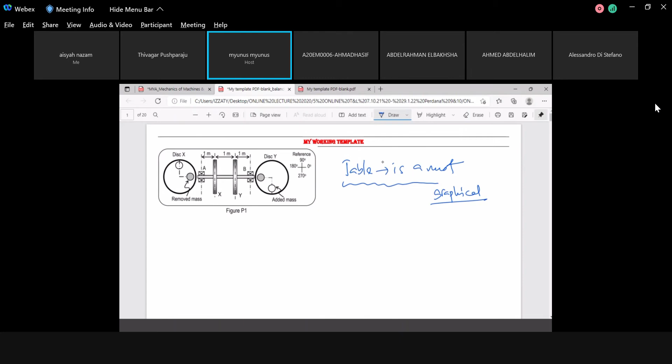So first we are going to construct the table, and the table is compulsory. It's a must. It doesn't matter which plane you start with. But the table is a must if you are solving graphically. For analytical it is an option. So now I'm going to construct it. I will start here.

Remember, start with plane, then you have mass in kg, then you have radius, which is in meter. You can also put it in centimeter, it doesn't matter. At the end of the day, you need to make the units consistent in meter. This one is the product MR, which gives you kilogram meter. The next one, put d here, in meter. d is the distance from one plane to another.

Then put MRd. This one is kilogram meter times meter, or you can put kilogram meter square. And last but not least is position, which is in degrees. So let's assume that you have plane A, then plane X, then plane Y, then plane B. You can also have plane A, plane B, X, it doesn't matter. I'm choosing this one as convenient to solve the problem. Okay.

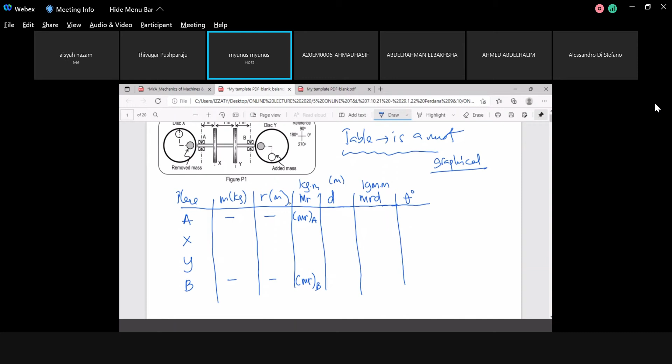Then you start selecting the reference. Yes, correct. So start selecting the reference. The reference for this one will be A and B, right? So put X. What is X? Go back to the question. They mentioned X, add 1, then remove 1. So put it here. Add 1 is plus 1. M1 is equal to plus 1. The other one is M2 is equal to minus 1.

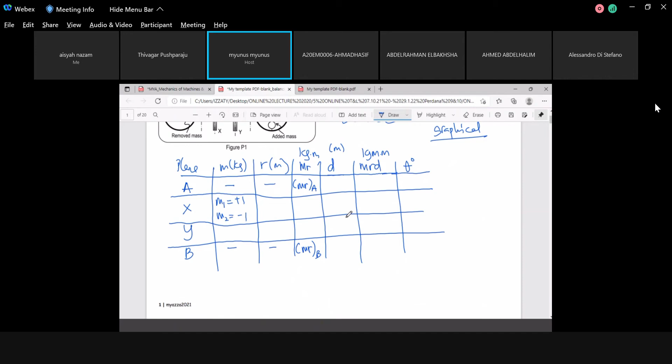Isn't it? So then you make a line here. You make a line here. You make a line here. Okay. Then the position as mentioned in the question. The radius is 3 cm and 4 cm. So put it at 3, but it is 3 cm, isn't it? Look at here, 3 cm. So you have to make the units consistent. Put it as cm. This one is 3 cm, isn't it? The other one is 4 cm. Put it at 4 cm.

And this one, what is the position? It's 90 and 0 degrees. It's 90 here and 0. And the question provides us this one. To make use of this position reference, put it there. This one, 0, 90. This one is 180. It is counterclockwise, starting horizontally, counterclockwise.

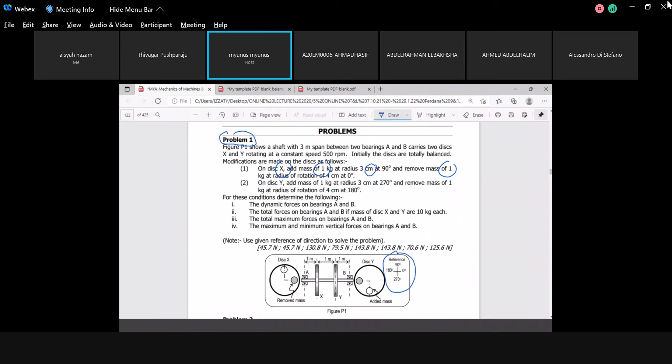Then what do you have for Y here? At Y you have 1 kg, another 1 kg, 3 and also 4. So put it here, 1 kg, M3 plus 1, and this one is minus 1, at the radius of 3 and also 4. Put it at 3, another 3 here, another 4, the radius. Okay, and the position mentioned here is 270 and 180. So put it at 270, 180. This one is 270, that one is 180. Okay, so these are the parameters that you have to fill in.

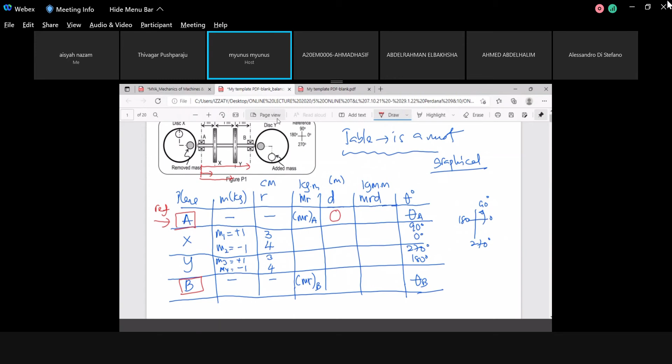So for X, for example, is 1 meter. Let me bring it a bit. For X is 1 meter. So put it there, 1 meter for X. For Y, is another meter, isn't it? It's 2 meters, right? I'm sorry, it's the wrong column. Supposed to be here, isn't it? Then 2. The next one is 3. For B, we put it at 3 meters.

Okay, now this is where you have to ensure that what you've done is correct. Why? Because one is in centimeters. This is a very typical mistake done by students. They put it in centimeters, and this one they put in meters. So you have centimeter and meter. Make sure that you use the same, consistent units.

Okay. So now, if you want to put this one in centimeters or in meters, what do you have here? You multiply by 100, isn't it? Yes or no? So now, we put this all in meters. So this one is 3 centimeters, it's 0.03, 0.04, 0.03, 0.04. So now we change it to meters.

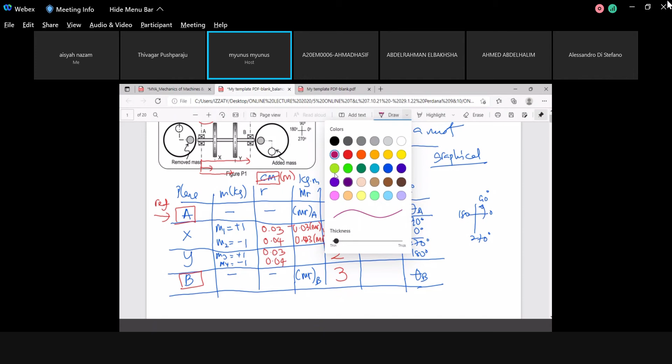And this one, MR1, MR2. But remember again, we have plus and minus, isn't it? You saw this one is plus. Let me put another color so that you can differentiate. This one is positive. This one is negative. Correct now? I purposely sometimes don't do this one in the beginning, because I want to ensure that you follow my lecture.

Okay, same thing to this one, so it becomes positive here, 0.0... Astaghfirullahaladzim, this one is correct, this one is not correct, isn't it? This one is 0.03, this one is 0.03, this one is not correct. Now this is correct. 0 point, this one what? This one is 0.04. Now it's correct? Now you have 0 here.

Okay, we have here positive 0.03, negative 0.04. This one is positive 0.06, negative 0.08. Correct? Then we have B, M, R, B. And we do not know the position, we also do not know the position. So now tell me, do you understand how I'm selecting or doing all the products of the table? Yes or no? It's not very difficult, isn't it?

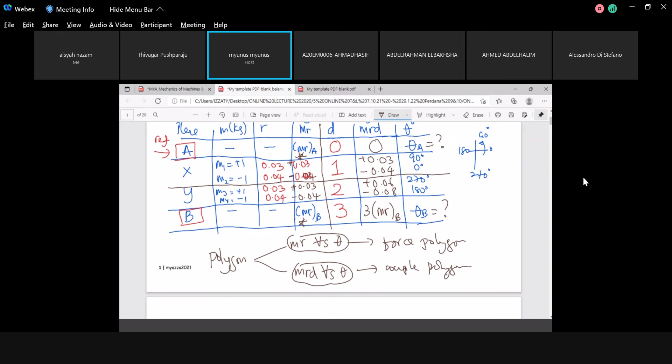Okay. So if you construct this one, you have two unknowns. This is unknown, this one also unknown, so you can't do that, isn't it? So we start with polygon number one. Start constructing polygon MRD versus theta, where the boundary condition complies, this one equal to 0, meaning that the polygon is a closed one. Okay, then start constructing.

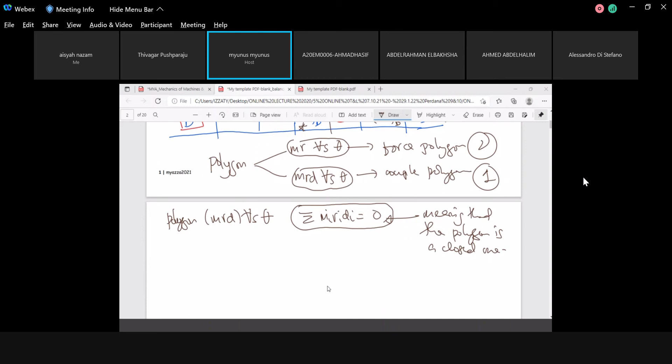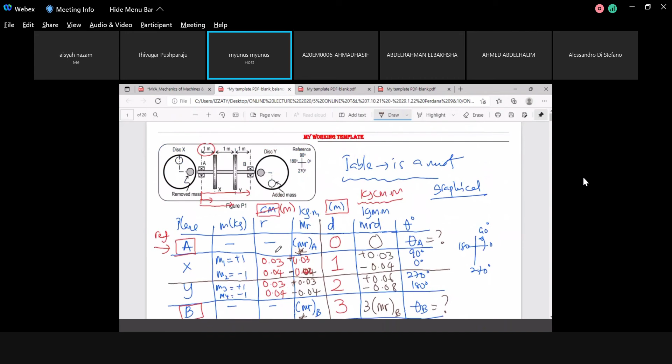Very difficult to construct because I need to make another blank page. What I have now. Again, the pull down menu is disturbing. I cannot hide the pull down menu, no idea how. Okay, never mind. I'm going to use this one as part of my polygon.

Okay. So now construct the polygon. What you have? You have 0.03, 90 degrees, so pointing upward. Pointing upward, 0.01. Sorry, it's not 0.01, it's 0.03, guys. My mind is not tuned to your class, 0.03.

The next one is 0.04, 0 degrees, so pointing toward your right. Remember this one? 0, 90, 180, 270. So toward your right. The next one, 0.06, 270, pointing downward. Then you have 0.08, 180. 180 will be pointing the other way around.

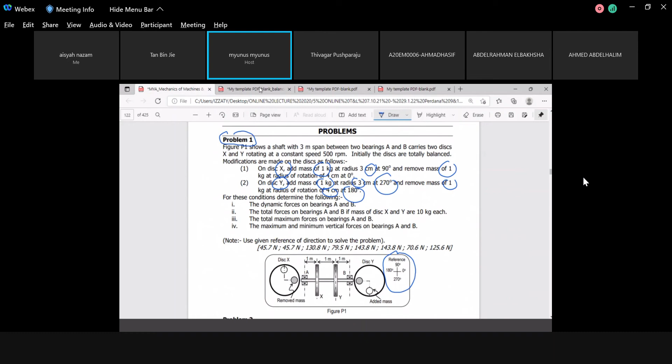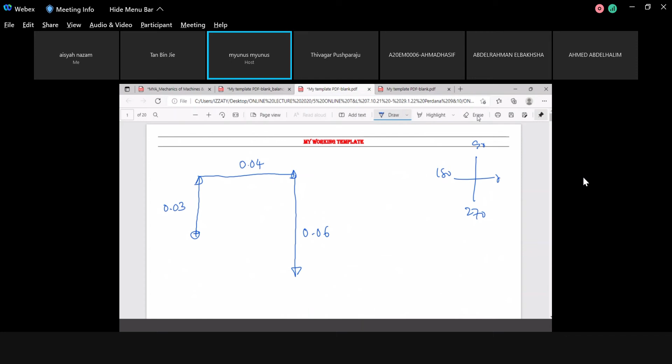Sorry, where do I get wrong? The 0 degree, the negative 0.04, right? We have 0.03, correct, 90. Oh, sorry. Thank you. This one's supposed to be 0 degrees. Let me clear the whole thing. I put the wrong direction, am I correct? This one is correct, 90 degrees. Start at the middle, it's easy for us.

90 degrees, 0.03. The next one, 0.04 is 0 degrees, isn't it? But it's negative, pointing to 180, so pointing this way. I'm going to clear this one because my polygon went out of the screen, so I need to put it in the middle.

The reason it's basically 0 degrees is correct. Pointing right, but you have negative here, so it will not point 0, but instead be pointing 180, because negative tells you the opposite direction.

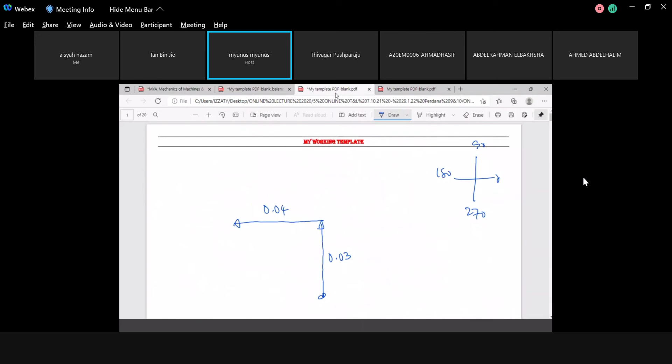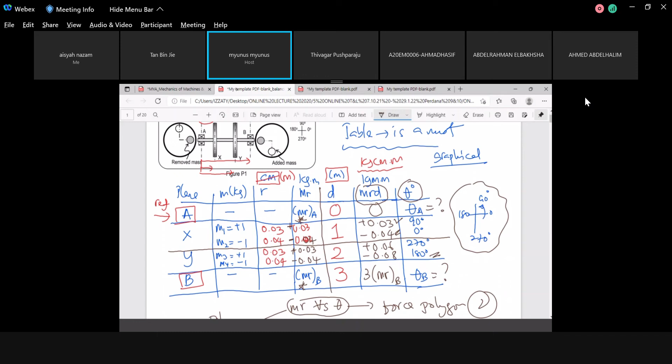So the next one is 0.06 pointing downward. Pointing downward is 0.06. The next thing you have is 0.08 negative, and it is 180. It's supposed to fall to your left, but you have negative here, so it will fall to your right at 0 degrees, so you will point that way with 0.08.

0.08, and it is not a closed polygon, but you know you have to follow this one. This is the boundary condition saying that the polygon constructed by the couple must be a closed polygon, so you force yourself to close the polygon.

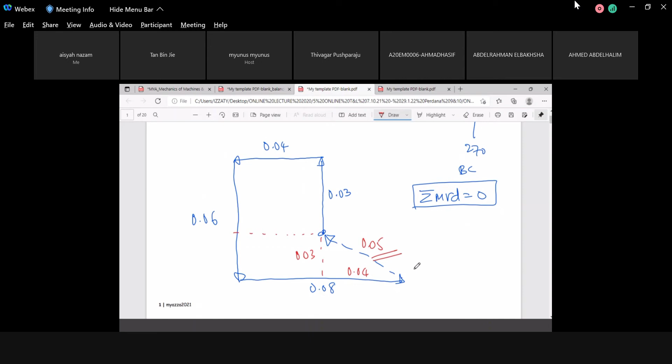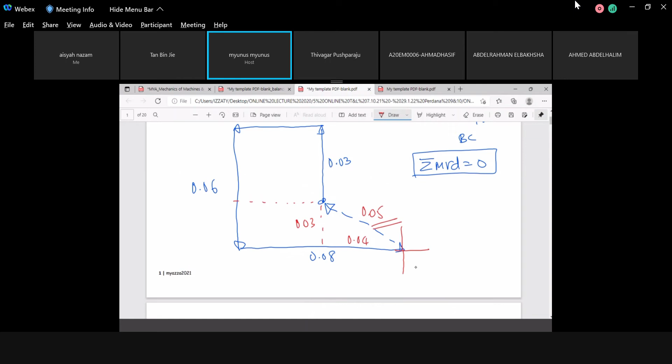Yes or no? So therefore, what we're going to look for just now is dynamic forces. So dynamic unbalance is, you will have, okay before that, class, you need to measure the angle. The measurement must be done following this counterclockwise from the horizontal, so you measure this one at tail, get theta, what theta unbalanced.

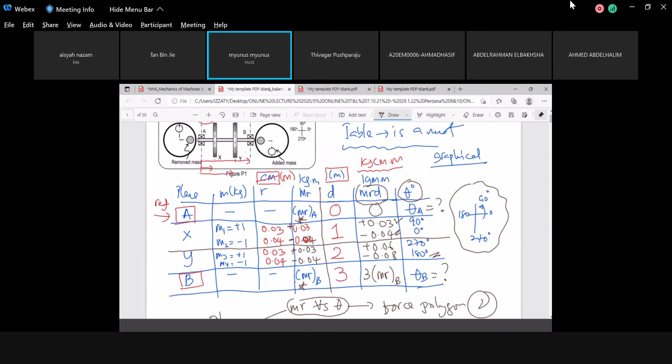Okay, so start this one. So now, therefore, you have the F. This one will be, the column belongs to P here. So you calculate this one, the last line will give you MRD here.

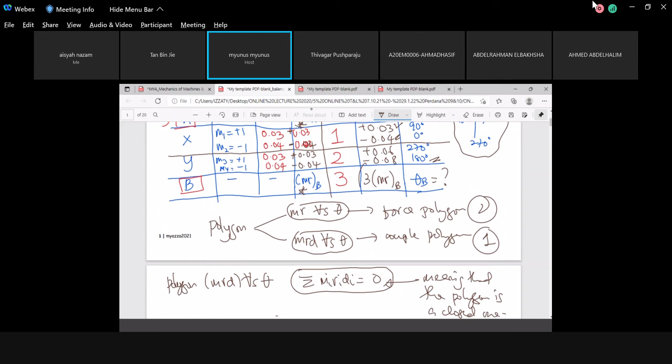MRD unbalanced is equal to, go back to this one, you have 3 MRB here. So you put it here, 0.05 is equal to 3 MRB. So therefore you will have MRB is basically 0.05 divided by 3, with the unit of kilogram meter.

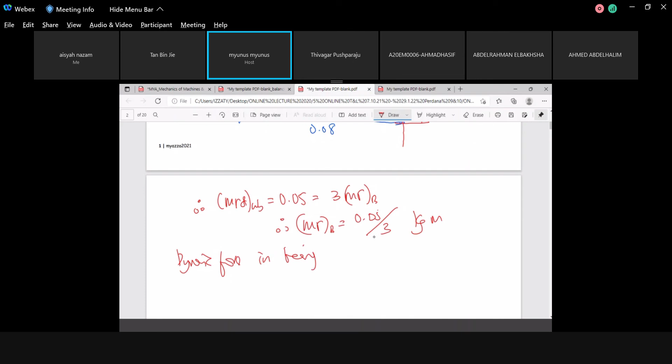And in calculation, to define the dynamic force in bearing, FB is equal to MRB omega squared. So you will have 0.05 divided by 3 multiplied by 2 pi, and the speed given here is 500 RPM. Put it here 500, multiplied by 500 divided by 60, squared, then you will have this one. The result is in Newton. I don't have the numbers here, I don't have the answer here.

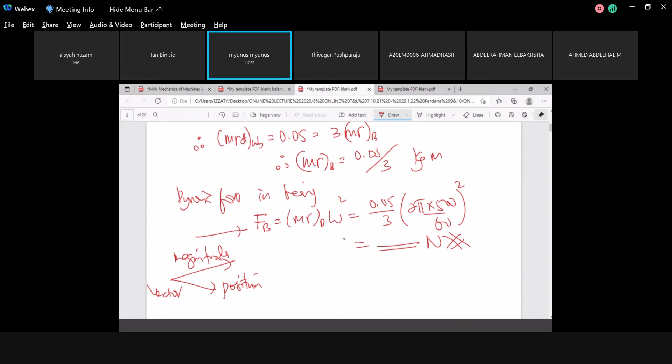Okay, so that is one. This is the magnitude, remember this one is magnitude. You need another one, which is position, because you are dealing with vectors. So the position is, you need to look for this one. You need theta, this small theta, put it there.

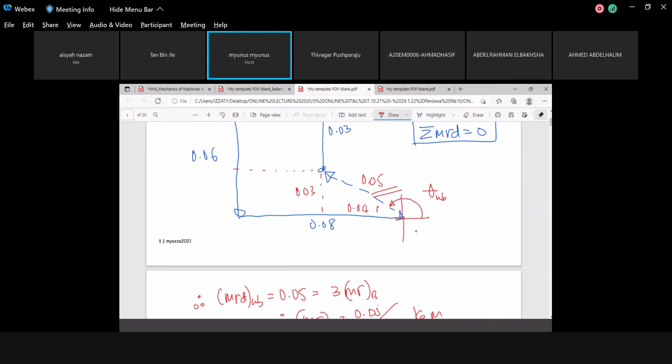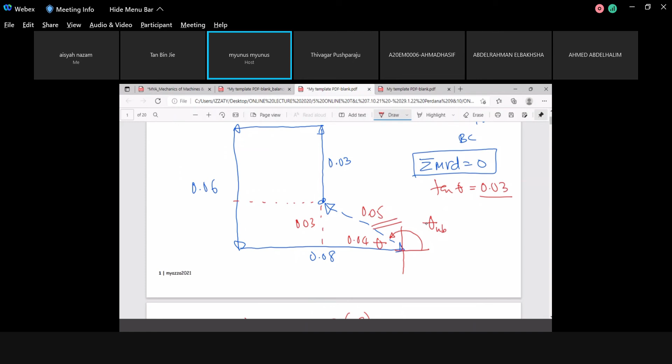No one interested to respond? Divided by 0.04. Thank you, Nani. So theta equal to what you get, Nani? If 0.3, this one arctangent, theta will be, what is the arctangent of 0.75? Anyone? 36, 30, make it 37. Thank you, because I don't have a calculator, I need your cooperation here, 37.

So this is 37. Let me clear this one so that you can understand. Let me clear about this one. Then this is 37, let me also use another color so you can easily differentiate. 37, so this one is 180. You need this one, right? You need this one, so we have 180 minus 37 equal to 1, what?

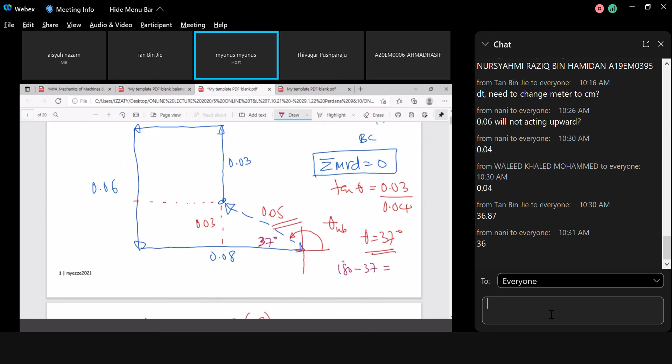1. Anyone? I just want your response. I can calculate basically 143. Thank you, Tan, 143.

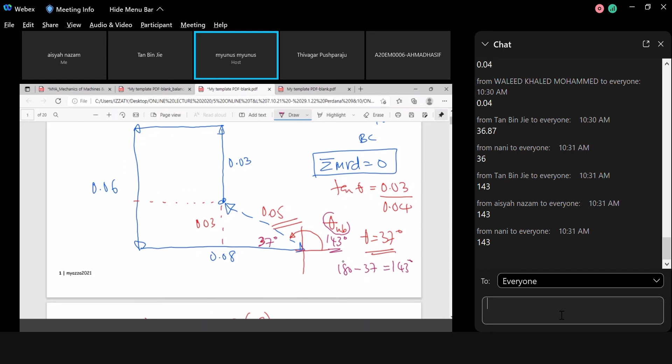So this 143 is your unbalanced, so you put it there, 143. So you go back to this table, clear this one, that will give you 143. This one is equal to 143 degrees.

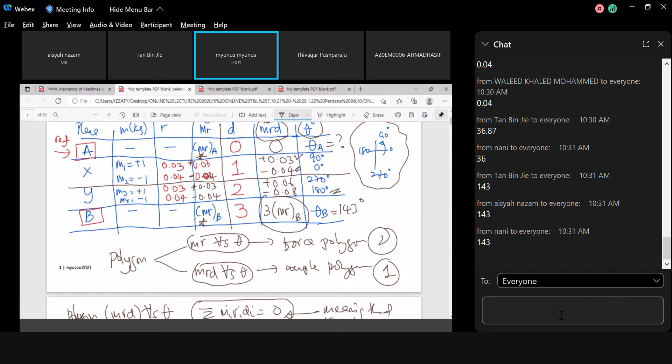Okay, then you go back to your calculation, this one, so you need the direction, right? So you take the last line into consideration, this one, which is now 143 just now, and this one is 37, and this one is FB equal to, could anyone tell me what you have here? I don't have numbers here, could anyone tell me?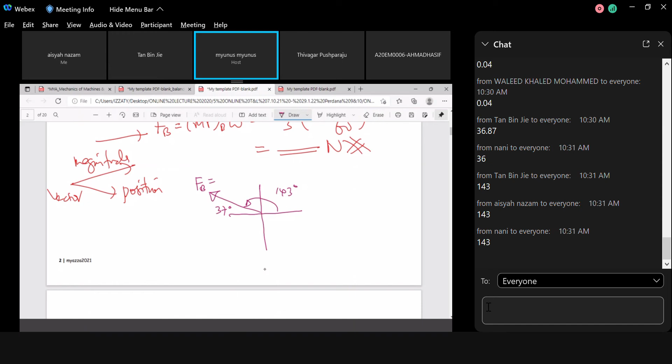Anyone keen to respond? Otherwise I just put FB on here. 45.7, sorry can you write, because the line is not so good. Your 45.7, thank you. So this one is the FB.

This one, what is this? This is dynamic force, correct? But the dynamic force acting on where? On where? The 45.7 with the direction of 143 degrees, measured from the horizontal, rotating counterclockwise, and measured, is the dynamic force on where?

On where, class? Let's make the class active. Thank you, shaft, on shaft. And this is not our concern, correct? Because the equation asking, you go back to the equation, it's asking about on bearing, put it on bearing.

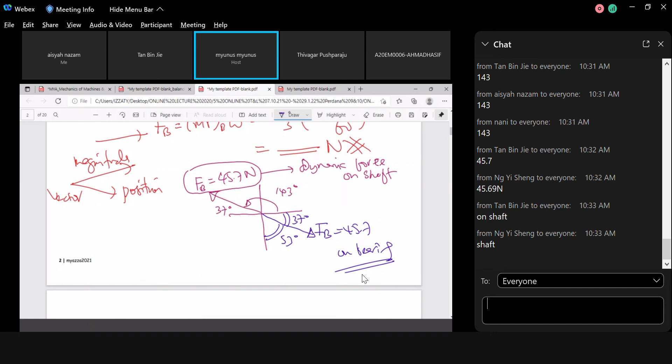It's 53. So both, this is on bearing. So this is the result. Bearing where? Bearing B. Okay, now we move to the next one. Any question up to here? Okay, we'll move to the next one.

We are going to construct another table, and sorry, another polygon - the polygon of force. So I'm going to open up another file.

Okay, now we have a blank. So constructing the MR polygon. So now polygon, this writing pad is giving problem. Polygon.

So your summation of MR equal to 0. So we should have the MR versus theta. So you construct this one, make it okay. Construct this one, let me put another color. This one now, we are going to construct this one versus this one.

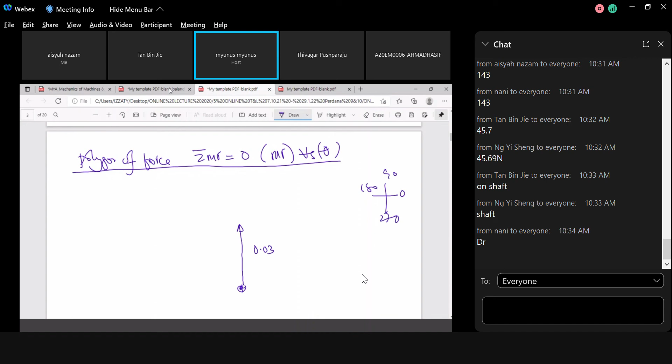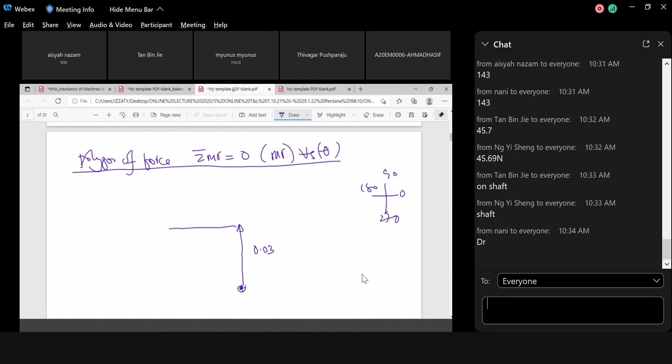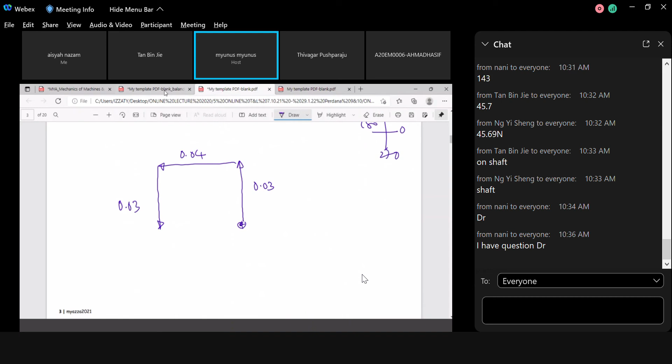Next, negative 0.04, 0 degrees. It's supposed to fall at here, but negative you fall here, 0.04. Next, you have 0.03, 270, and 270 is pointing downward, so it will basically same length, 0.03. Next, you have 0.04, negative 180, and 180 is supposed to be pointing to left, but you have negative, it's pointing to here. Then you found this one, 0.04, and it's a closed polygon, isn't it?

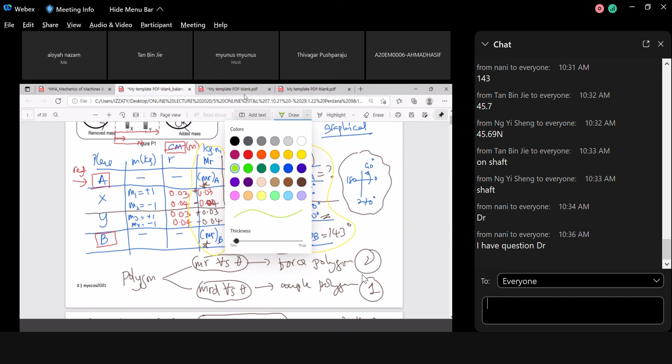But not to forget that you have another parameter, which is this one, this MRD just now. This one, put it here. You have that one. This one, put it here.

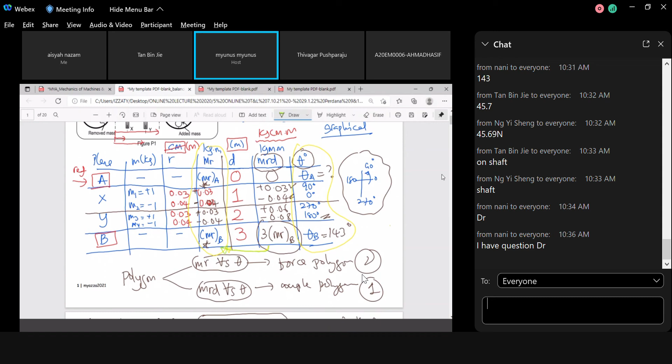Okay, 3MRB. So what do you have for MRB just now? MRB just now is 0.3 divided by 3, isn't it? So you put it here.

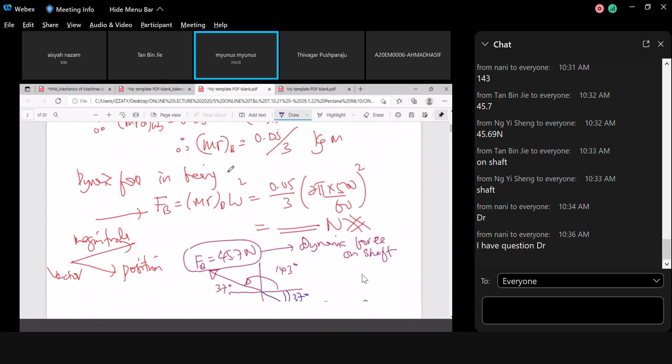The MRB you have 0.05 divided by 3. Am I correct? Yes or no? So this one is 0.05 divided by 3, so you put it here.

At theta B equal to 143, just now measured by our friend, so we'll be pointing this one this way. This one is 143 degrees, end up here with 0.05 divided by 3. Yes or no? Yes or no?

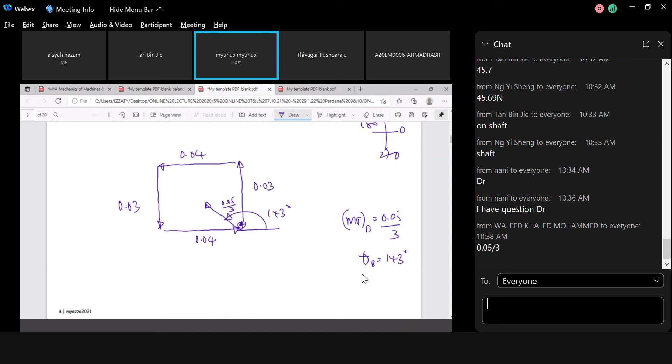Anyone respond? Do you understand in class? Hello? No one wants to entertain me. Why are you crying just now?

Understand? Thank you, Tan. Okay, now, thank you, Aisyah. Okay, now it is again not balanced, right? So how to balance it? Is to balance it, bring back the line, and the line must be formed at the starting point. This is your starting point, starting point. So you bring the line, and the line will fall at the same place.

So this one will give you the M unbalanced, equal to 0.05 divided by 3, the units of kilogram meter. Right? But now it is pointing downward, pointing downward. Then you measure this one, measure this one back.

Yes, Nani, speak up, Nani. I basically can't catch all the equation in your explanation, why the pointing upward and pointing downward just now. Yes, Nani, speak up, Nani. I'm waiting for a response, Nani. Nani.

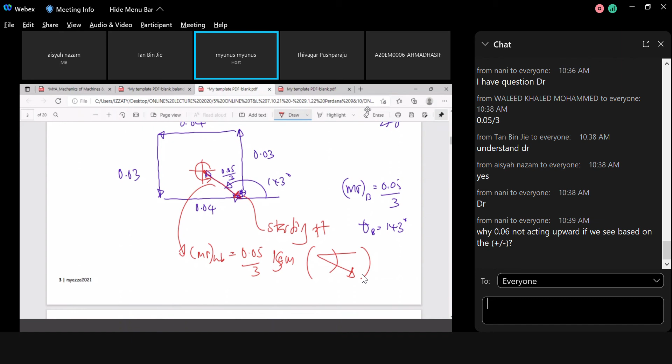Yes, doctor. Yes, which part do you not understand? The 0.06 earlier - if we see it based on positive or negative, why is it acting downward, not upward?

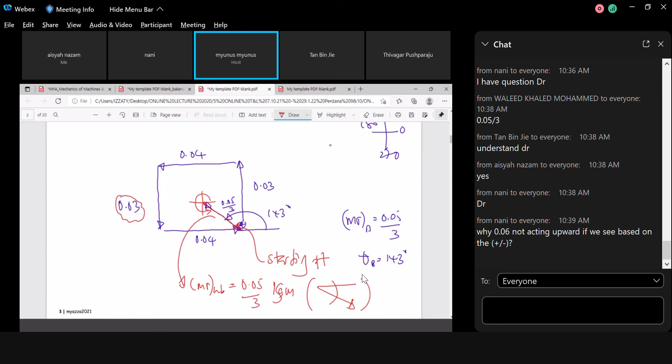Are you talking about this one? No, which one? The 0.06 earlier. Oh, just now. Yeah. Oh, not this one. Okay, come back, never mind. Come back to here. Okay, this one, yeah. Okay, the reason is why - let me check, first we have to go back to the data.

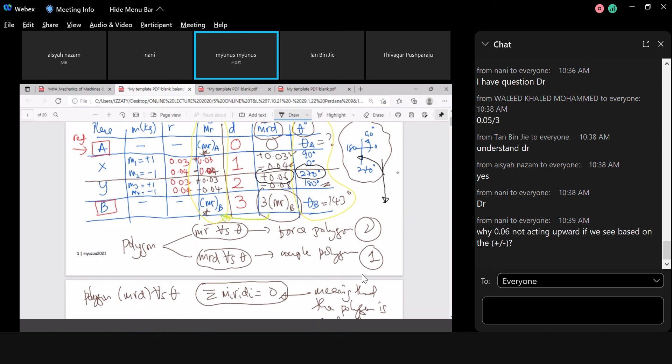0.06 is at 270 - this one is this one. Let me put another color so you can see. Yeah, 0.06 here at 270, isn't it? And 270 is pointing downward. Correct? This one, yes or no? Yes, so that is yes - why this one is also pointing downward.

Okay, but I'm going to say 0.04. Why? Okay, look at here, correct? 0.04, look at here, they focus on this one. Let me clear about this one. Let me clear this one. Okay, never mind, never mind. Okay, take another color, okay.

Now this one is negative 0.04, correct or not? This one, yes, negative, isn't it? Okay, now 0.04 is at 0 degrees. Okay, put it here. Okay, this one, yeah. 0.04 and negative, yeah, and 0 degrees.

So you have, where is your 0 degrees? This one, correct, this one is 90, this one is 180, this one is 270. Correct, so it's supposed to fall here. I agree with you, but when we have negative, it will not fall at 0 degree - it will fall at 180. So you have 0.04 and 180.

Agree on? Agree. But 0.06 is positive, right? Yes, it is positive, and the 270 is pointing downward. Am I correct or not? Yes. So which one do you not understand?

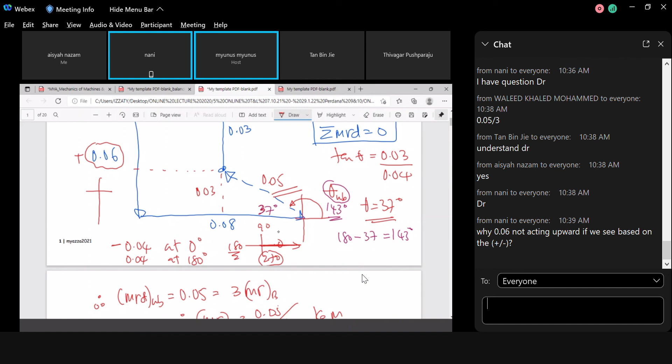This is 270, pointing downward, so it'll be pointing downward because 270 is pointing downward. So this one is 0.06. If you found that this one is not positive, instead it's negative, so it will not be pointing downward, it will be pointing upward. It's always opposite when you have a negative.

Oh, I see, okay, okay. Okay, it's always negative - just remember that if your negative sign is always opposite from what you have. Okay, I hope you can understand this one. Yeah, so let us now move to this one.

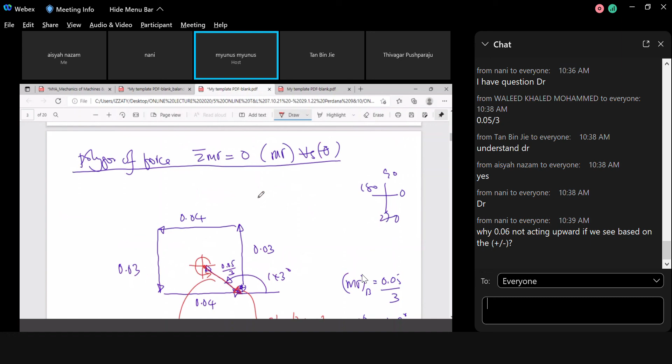So we completed this one. We found that FB is equal to MR of B multiplied by omega square, and we found that you will get the same result from the previous one multiplied by 500 divided by 60, where you will have what we have just now - 45.7. You have 45.7 Newton.

It's 45.7 Newton, and the position now is not as what you have here. This one you have to measure. You have to measure, and you can also calculate. Okay, now let me show how to get theta B. Easy, right?

Okay, how to get theta B? You can measure or use calculation - you measure or use calculation. How is it? Look at theta B, yeah? Okay, we have - okay, now put it in the last line of theta B.

This one, remember this, the last line - MR unbalanced is equal to MR B now. So you need to know what this one is, correct? So this one is theta unbalanced is equal to theta B. Yes or no? Put it this one. I'm zooming in on this one.

Okay, and you already calculated this earlier. You already calculated earlier this one. Earlier, yeah, is 143 degrees equal to theta B. Am I correct or not? So this one becomes 37. Yes or no? Because this one is also 37.

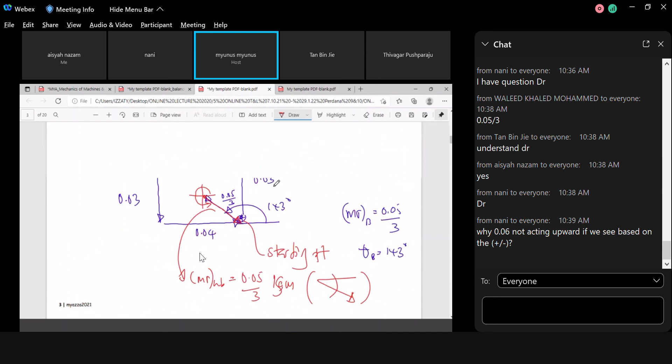So this one, so what do you have here? You will have 323 degrees. So this one you have to put in the table - put it in the table. 3, 2... sorry, the table is in the other file. Huh? This one will be 323 degrees.

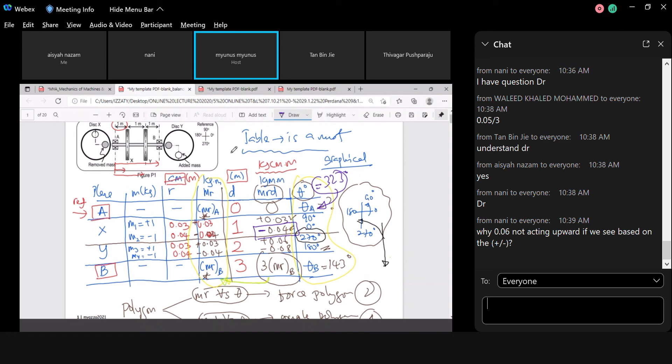So that will be the completion of - sorry, astaghfirullah, this one is supposed to be here. So that is the completion of your table. So the next one is to calculate the force. You take the last line here - take the last line, always take the last line. Yeah, always consider the last line.

So take the last line now. You have FB - you calculated FB as 47.5 degrees just now. Okay, so the position will be, take the last line.

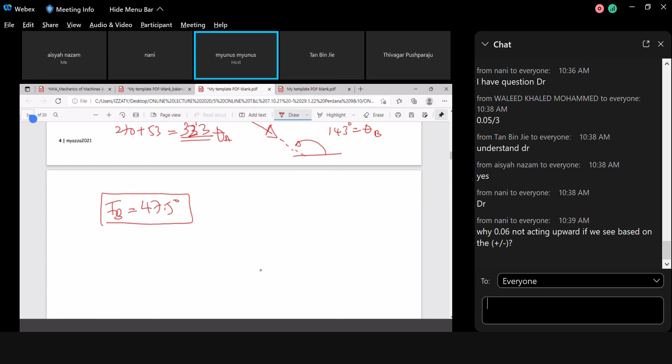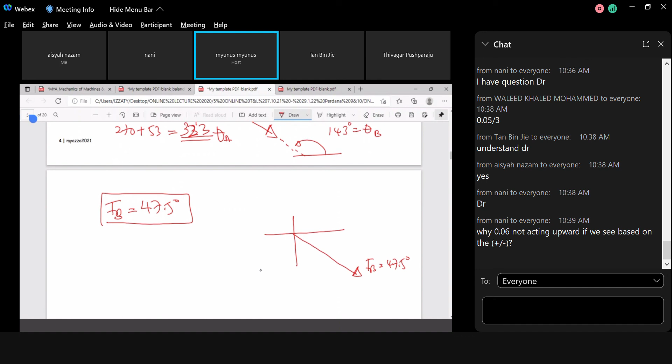This one is FB equal to 47.5. This one you calculated just now is 323 degrees. This one is 37. This one now becoming 37 also. So this one is on shaft, agree or not? This one will be on bearing. So the on-bearing one, take another color. Put this one on bearing. Same magnitude, FB equal to 47.5 on bearing. This one on shaft.

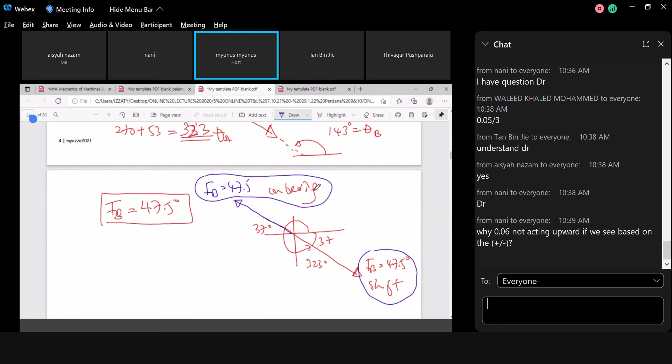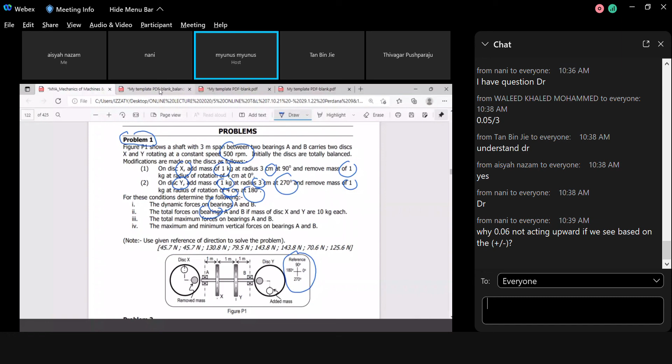Understand now, class? So that is the first part of your question, only the first part. Now we completed the first part only. So the second part is talking about total force on bearing. Remember, when you're talking about total force, it's basically coming from static and also dynamic. The dynamic one is completed. So you have to focus on static.

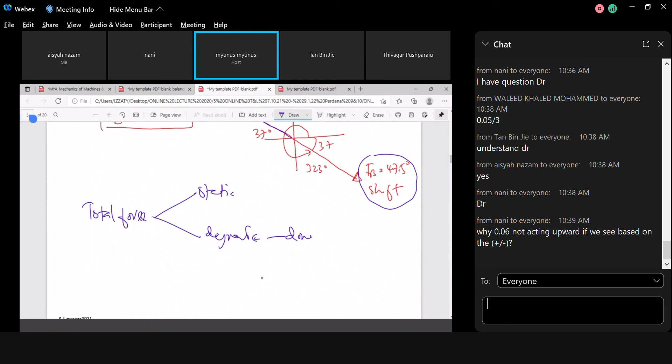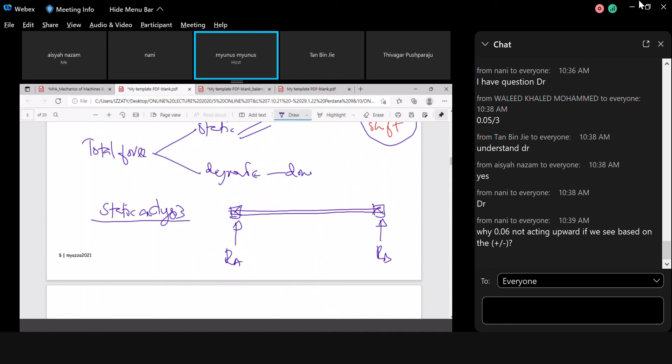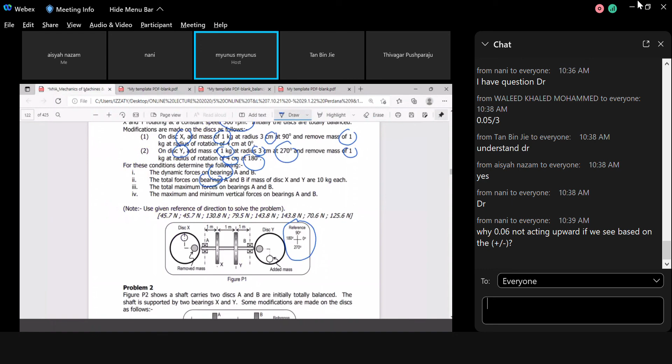Okay. How are you going to do static? You go back here and you have to do the free body diagram. So if I can share with you the free body diagram, static analysis. Shaft. It's correct now, isn't it? A and B, put it here. This one is RA, RB. You have two discs pointing downward, mg, mg. And if I clear this thing, this one is X, this one is Y.

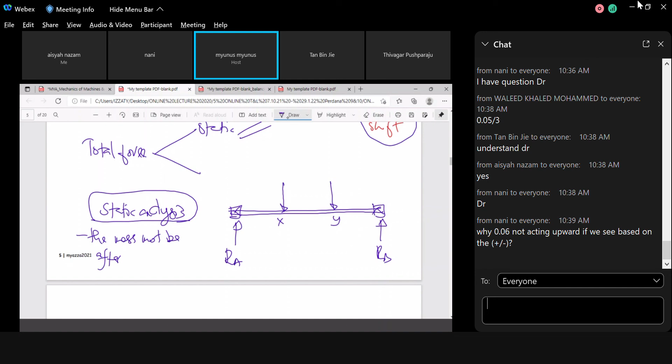So remember, when we are doing the static analysis, the mass must be what? Who can remember? Must be after? Modification. Thank you, Tanya. Must be after modification. But here we are very fortunate, because they provide you 10 kg, plus 1 kg, minus back 1 kg. So basically it comes to 10 kg times 9.81. Same thing happened for Y. But in conclusion for the theory, it must be after modification.

The reason is, when you add and take away mass, you found that the final mass will be the mass that the bearing will be supporting. In theory, you have to understand that after you add mass or remove mass, the final mass must be the mass supported by the bearing. Okay, now you do this one as usual.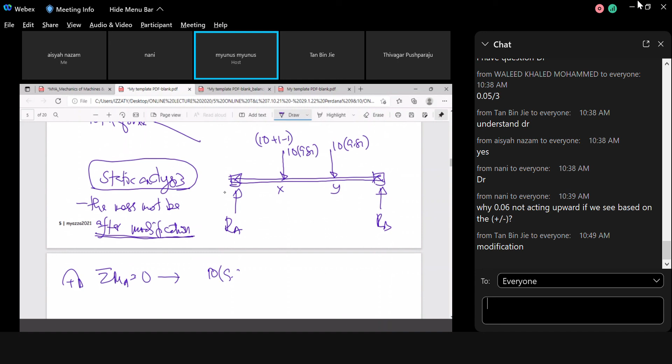Apply summation of moments at A equal to 0. So you will have here 10 times 9.81, this one 1 meter away. It's very easy now. Plus another one, 10 times 9.81 multiplied by 2, is equal to RB multiplied by 3. Correct? So you will have here 10,

One more minute, sir. Okay, sorry. I know that you have another class. Can you give me what the numbers will be here? So we will continue this one the day after tomorrow. Yeah, this one is Newton.

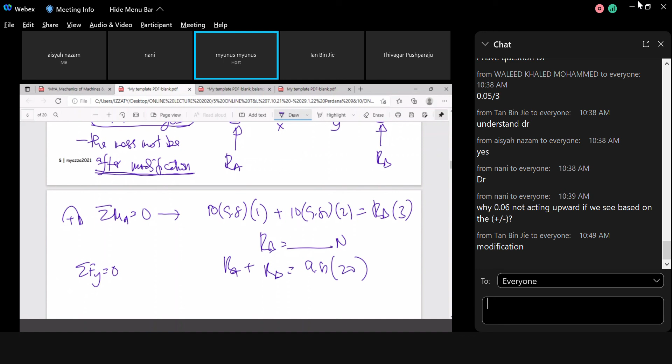And the other equation will be, sorry, astaghfirullah, the other equation will be summation of Fy equal to 0. So we have RA plus RB must be equal to 9.81 times 20. Okay. So I will stop here.